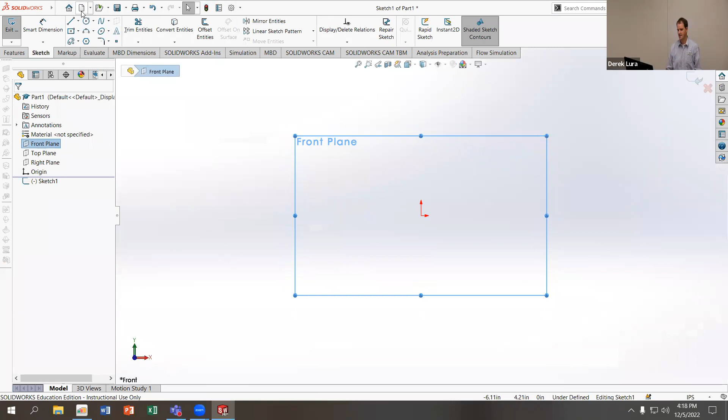I'm going to go to my front plane, it's my favorite plane to sketch on. I'll give myself a fairly generic spline pattern of basically a little head, and then a slightly larger body. Then I'm going to close that off with a vertical line going down the middle of the part. Just to give Solidworks a clear intention of what I want, I'm using a center line that's a little bit longer than that. I'm going to clean this up.

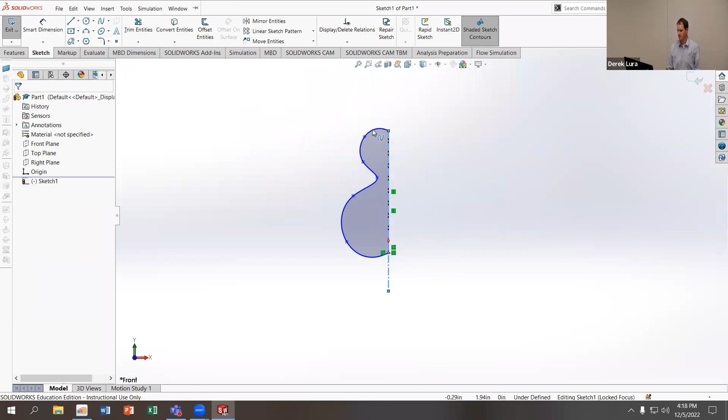I'm going to exit the line tool, click on my spline, and make sure these first two lines are horizontal. I'll click on this line here, make it horizontal, which makes the top line all flat. Then do the same thing on the bottom of the spline - click on the horizontal, that makes the bottom of the doll flat.

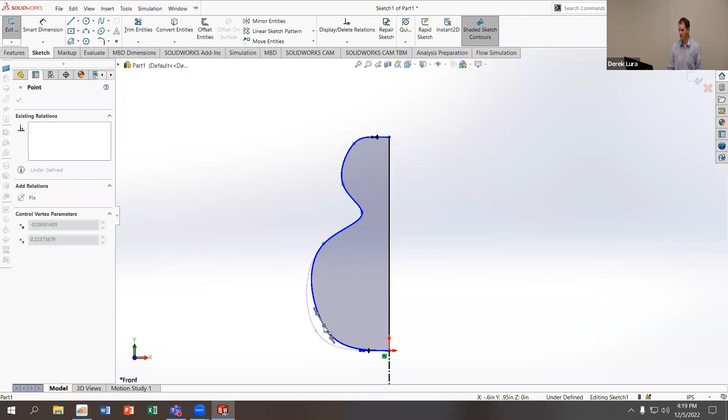Then I'm just going to balance the kind of curvature of the head and the neck. That's a little bit more what I want. I don't want this neck to come in too far, just because that'll make it harder for me to manage the balance of where it nests together. So that looks okay, I'm going to keep that.

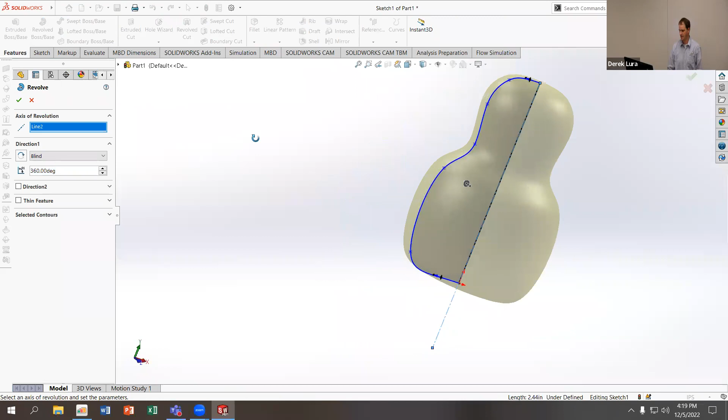I'm going to revolve it. Select my axis, which I was hoping not to have to do. Hopefully it works, but I'll open it up. And so that'll be the core of my doll.

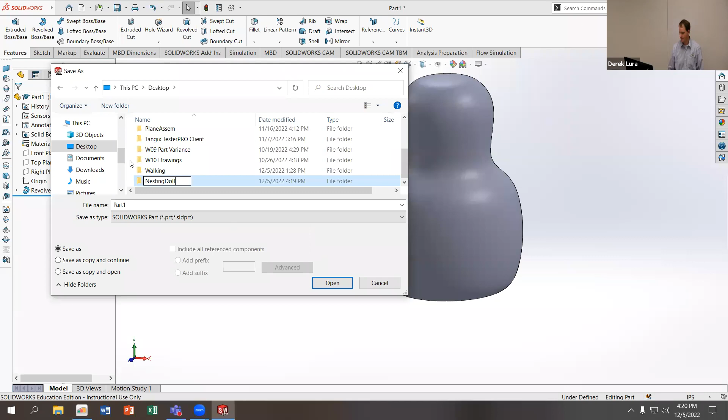So I'm going to save this - to the desktop, and make a new folder called NestingDoll. I'm going to save this as core.

Now what I want to do - the core of the nesting doll doesn't come apart, but all the subsequent layers are larger, empty versions of the core that have a split around the middle. So I'm going to make a derived part from this core, scale that up, cut it out, and then also go through and add those pieces to it.

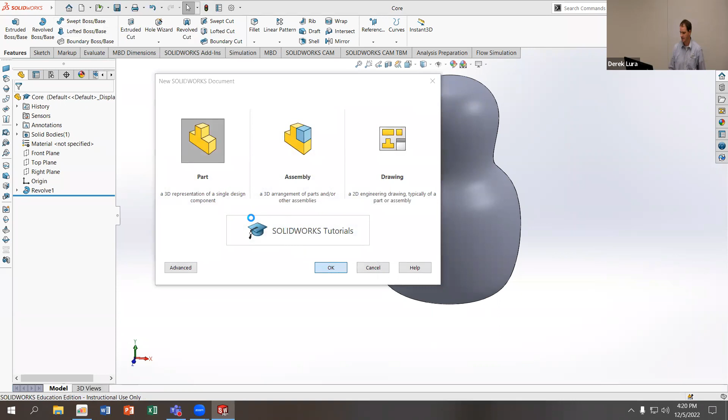So I'm going to do a new part, also in inch pound second. I'm going to go find my core file - to my desktop, my nesting doll folder, my core. I'm just going to drag that into this window.

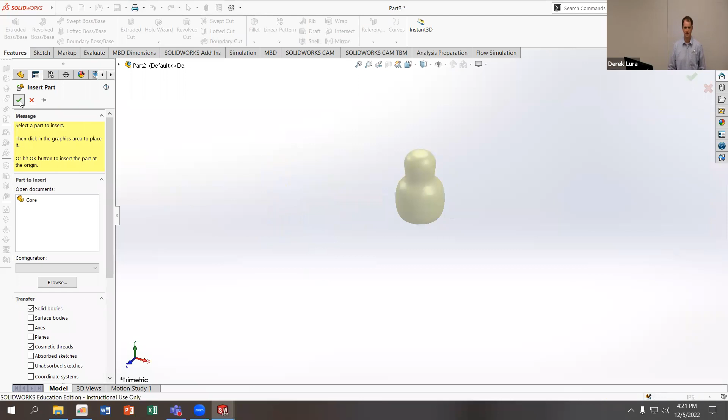It's asking, do you want to make a derived part? I'm going to say yes. I'll click on the green check mark because I want the origin of this derived part to be the same as the original part. I'm saying yes to make the units the same - I thought I'd already done that, but I want to make sure it's consistent.

To make this a bigger, hollow version of the doll, I want to scale this up, then shell it out so it has a certain thickness. In the assembly, we'll verify that thickness is appropriate. I also want to make sure I have clearance so these things will fit together in my assembly, and then I can cut them apart and have that work.

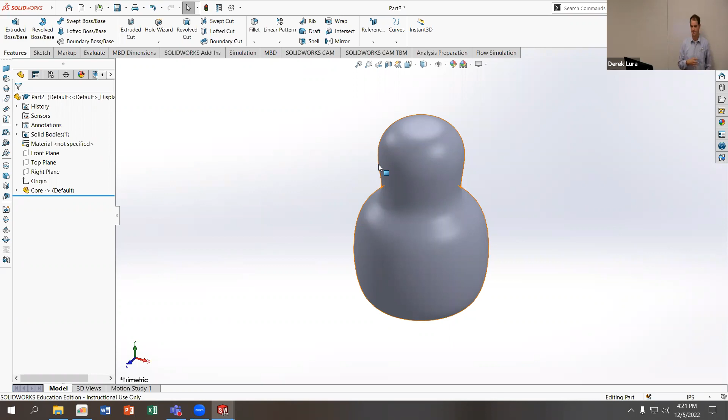So to make them work as two separate cut pieces, I really need a top and a bottom configuration for each of these. And then I can also make my scale a configuration. So let's walk through that process fairly quickly.

First, let's scale the part. I'm going to use the scale tool to make this bigger relative to the origin. I'll use a uniform scaling about the centroid of the part, and make it 1.5 times as big. Again, I don't know off the bat that that's an appropriate scaling, but I'm going to use my assembly to check and see whether this nesting doll actually fits together, by looking for collisions and moving it around based off those positions. So that's my new doll.

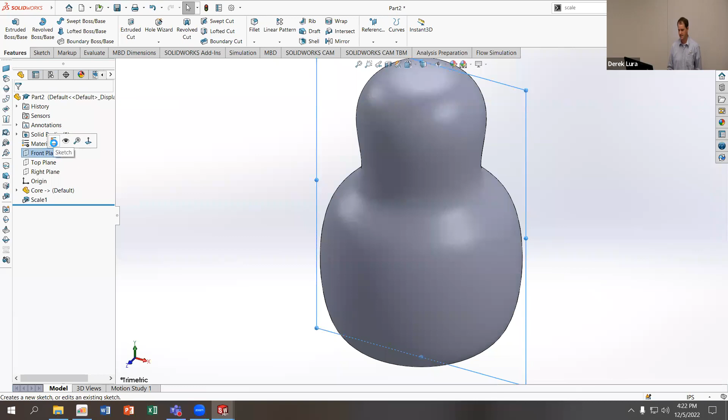I need to cut it into two pieces. So I'm going to go back to the front plane and sketch. I'm going to draw the line I want to cut this around, starting on the outside of the doll, going through it a little bit, making a little bit of a shelf, and then coming all the rest of the way in towards the middle.

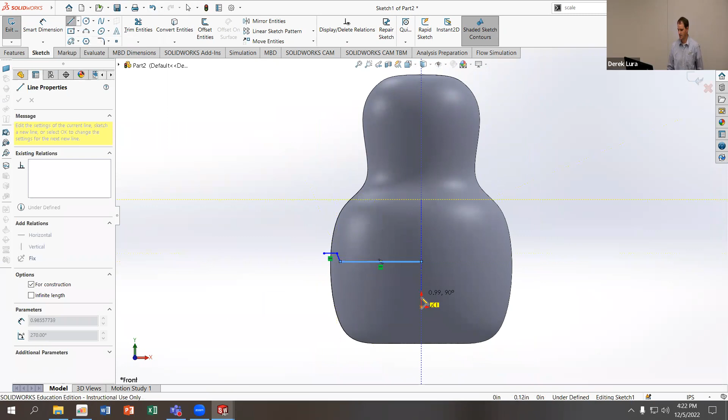And then I'm going to give myself a center line that goes vertically through the origin. What I'm going to do is thin revolve this, and then I'll shell this last inner portion after that. I might want to add some dimensions to this so I know exactly how big it is, so we'll give that some dimensions.

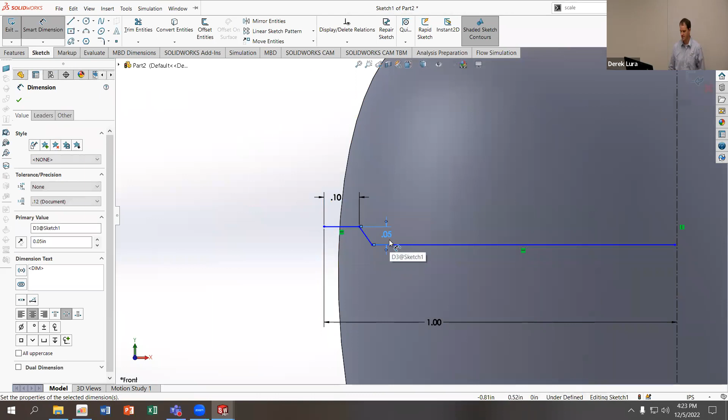I'll make that 1 inch. I'll make this little end section 1/10 of an inch. I'll make this section here—I don't really want to go down that far, just enough of a shelf that I have capacity there. Something convenient for this angle, 45 degrees, that's going to help us locate the 2 levels of the doll.

And then you just figure out how far up it needs to be from the origin. So just going to get that point. That looks good. And now I'm going to use my features tool.

I'm going to use a revolve cut. Actually, I do want to make sure that this point here lies on my center line. So I'm going to make sure that lies on my center line as well, because I do want to totally cut this doll into 2 complete pieces.

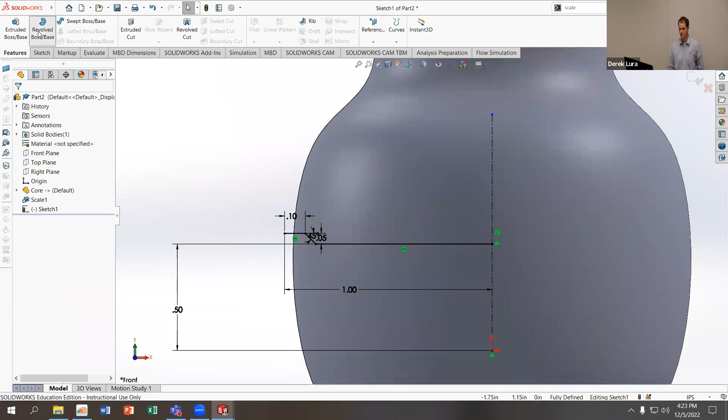So I'm going to do revolve boss base. I want to say no, so I don't want to automatically close this. I do want to use a thin feature, using mid plane, and I want this to be really thin. This is really just the clearance between the 2 halves of the doll.

So I'm going to make this 0.01, so 1/100 of an inch. I'll accept that, that's right. I also want to make sure that I'm not merging these 2 together, so I'm going to unclick the merge result function.

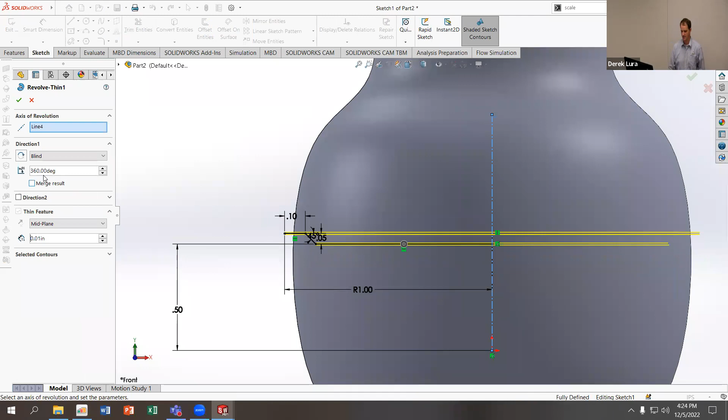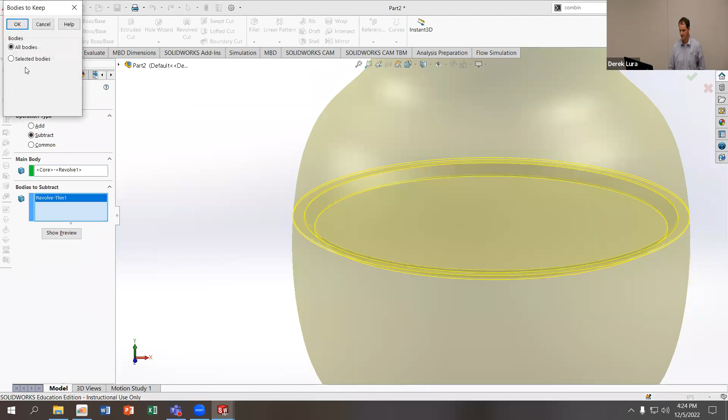Now I've got these 2 portions. I'm going to subtract the disk that I just revolved from my original body. So I'm going to use the combine feature, and subtract from this core body my revolve. And then I'll keep the remaining bodies.

Now I've got my piece. Now I'm going to make 2 configurations, 1 for the top and 1 for the bottom. So I'm going to do a new configuration, call this bottom, and then I can rename my default configuration.

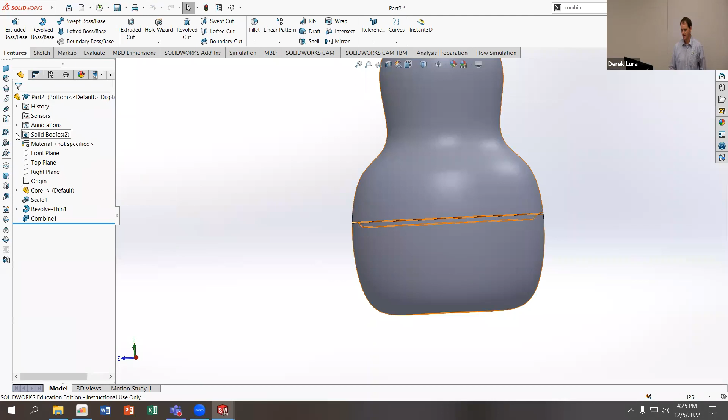So if I start with my bottom, because that's the current configuration that's active, I'm going to delete the top. Again, this is not the same as actually deleting the body—it creates a feature that deletes the body that we can roll back and suppress and treat like any other feature in SolidWorks. And then I'm going to shell out this bottom portion.

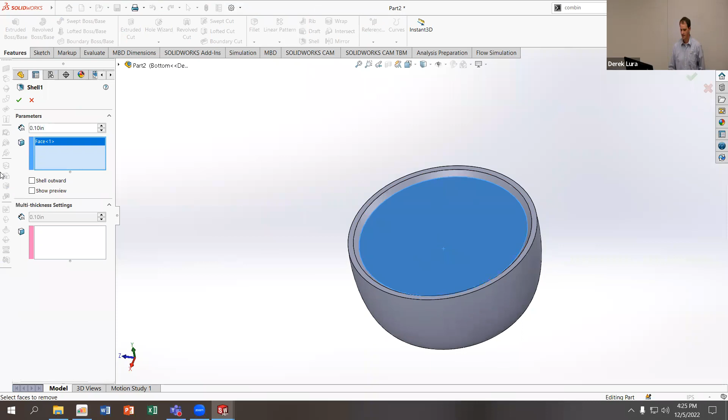So I'm going to use the shell tool, and preview here. A thickness of 0.1 inch, that's probably appropriate. Let's just see what it looks like. Okay, we've got a little rounded edge there. That looks okay. I'm going to save this. We'll call it outer one.

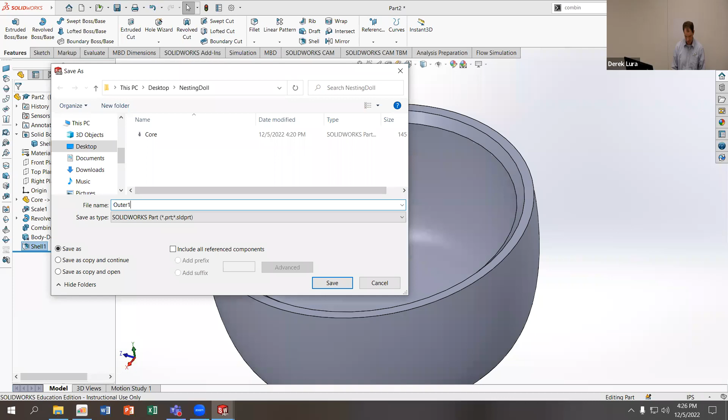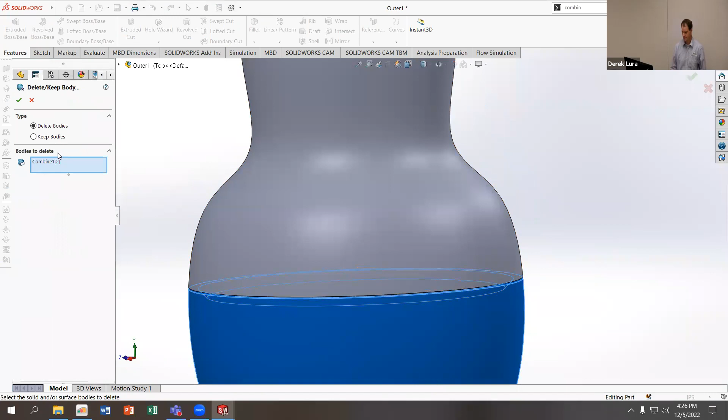And then I'll switch to the other configuration. In this configuration, my delete of the top is suppressed, and so is the shell. So on this new configuration, I can delete the bottom and then shell the top.

That one didn't quite work as well because I have this large overhang from this inner edge here. But what I can do here is go into our shell options and use a multi-thickness shell. I'm going to set the thickness relative to this guy here—oh sorry, wrong one—bottom here, and I'll make this thickness very small.

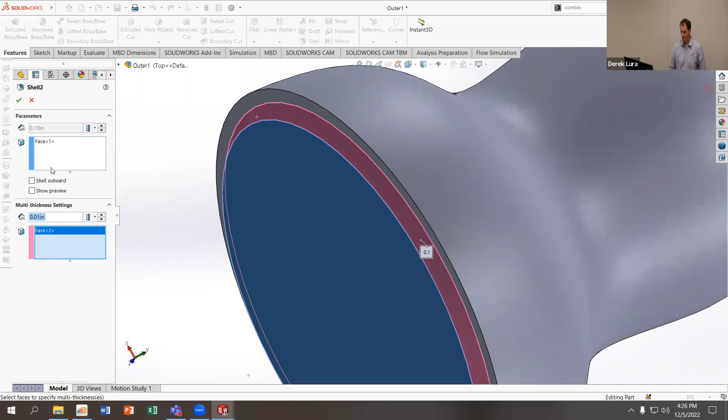So let's say this is 0.01, not 0.1. And so that makes this overhang on this portion quite small. Another thing I can do here is if I want to get rid of that edge, I can add a round to that. It's going to really kind of cut away that edge even with a fairly small radius round.

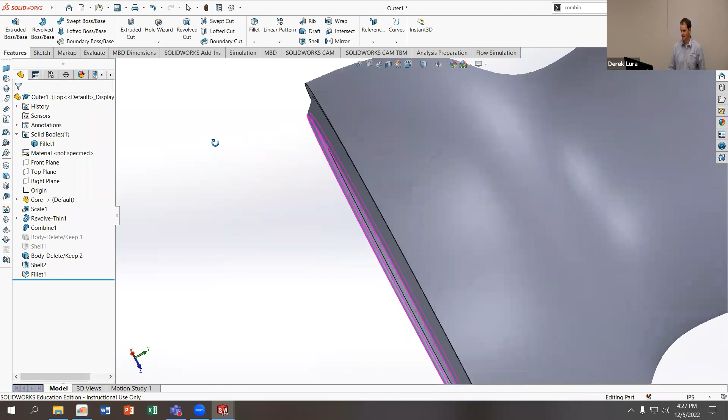So that helps smooth that out. Just a couple of tricks you can do to get that to work out a little better. If I wanted to totally cut out that top edge, I could, but I do want it there to help me locate the doll relative to the bottom portion.

We're going to save that. Now I've got these two configurations. I can put them together to make my next step, so I'm going to go into an assembly, make assembly from part. Let it load. In my assembly, I'm going to start with the core.

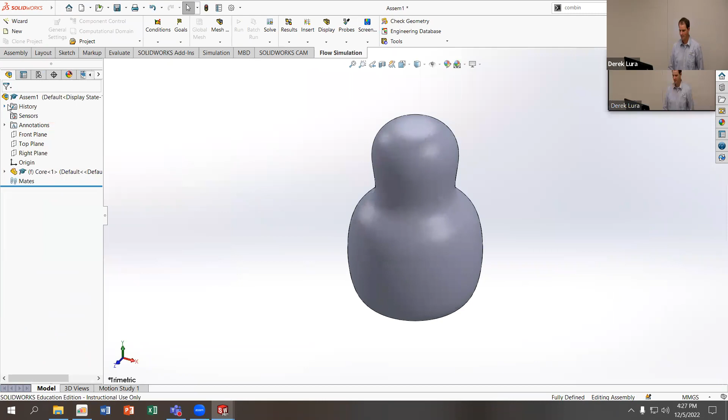Add my outer layers. So getting back to assembly, insert components, do outer one, accept. Then I can change the configuration of this to top and bottom, and also insert another component. Because I'm using that check mark, all these are fixed to start off with, so this is the first original configuration.

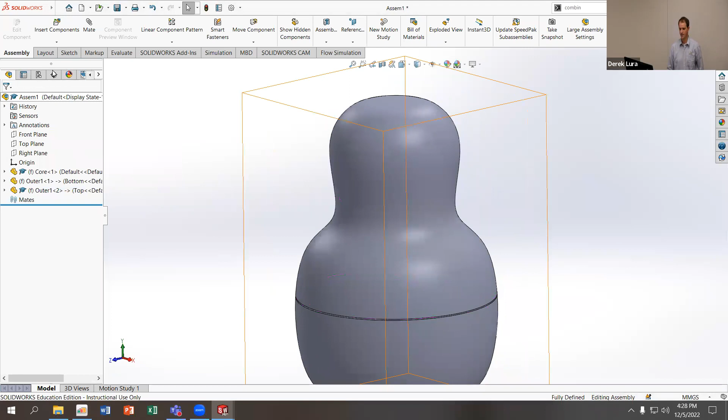I can look at my section view. I can see that nothing is hitting each other at the start. I can also evaluate, look at interference detection, calculate that I don't have any interferences, so those fit together just fine. And I can float my top, and then I can move it.

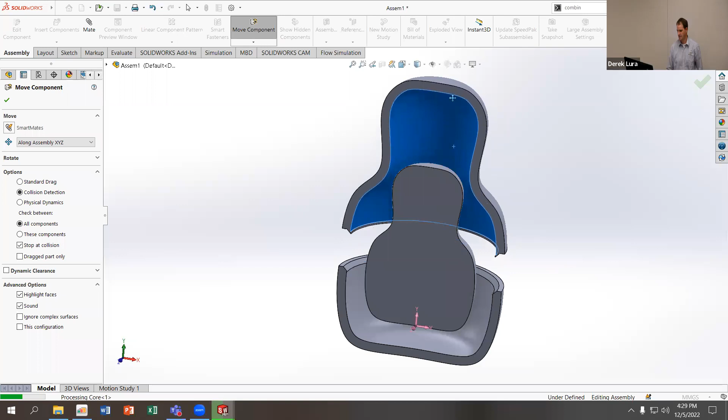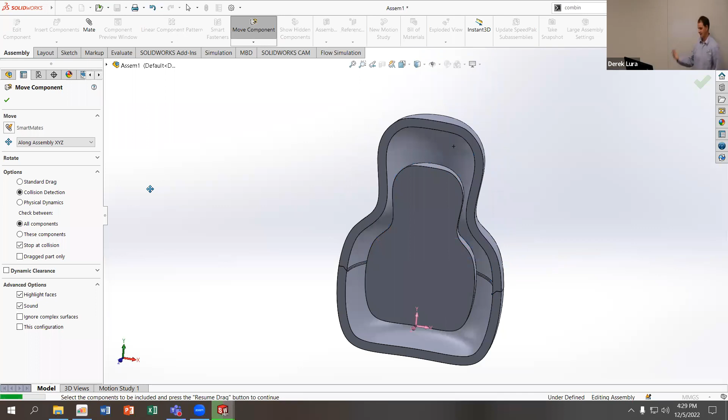So I can confirm these components will nest together without hitting each other. And I can go back and change the profile of this to do that again, and repeat as many times as I want.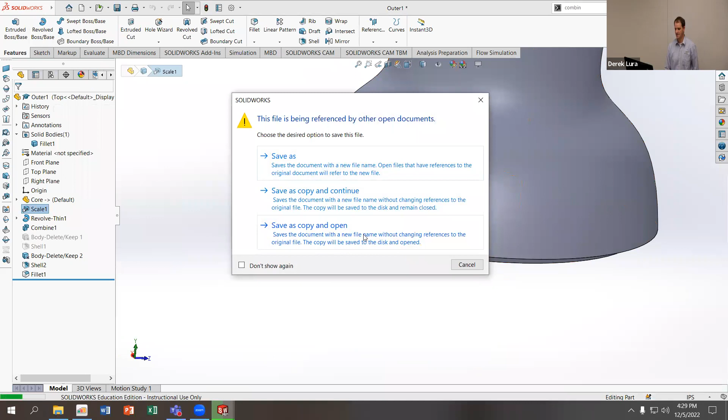If I want to get extra cores of this to get more layers of the doll, it's pretty simple for me to come into my outer component. I can either modify this scale or scale again. If I want to scale again, all I have to do is save this as a new part. I'm going to save it as a copy and open - this is saving as a new name without changing references to the original file.

So I should leave the original file where it is. Change this to outer 2. I can keep the original document open, that's fine. And I can edit this scale, and I can make it say 2. And that broke my part.

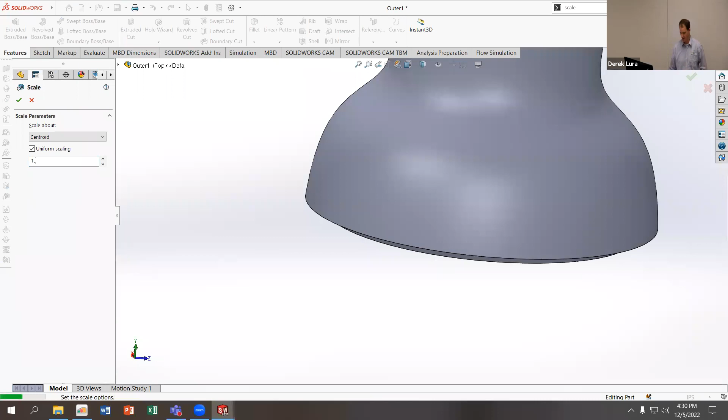If you have that issue, well, maybe we just scale it after that - use the scale feature again. The breaking is most likely because the thicknesses of the cut that I did on the original didn't all intersect the model the way they're supposed to after that. So I can save this.

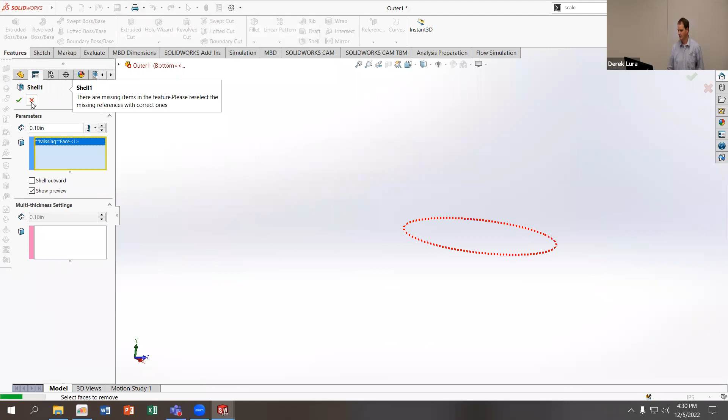I want to make sure that scale exists in both configurations. So I'm doing my bottom. Not sure why that one... Oh, because it has this new scale still.

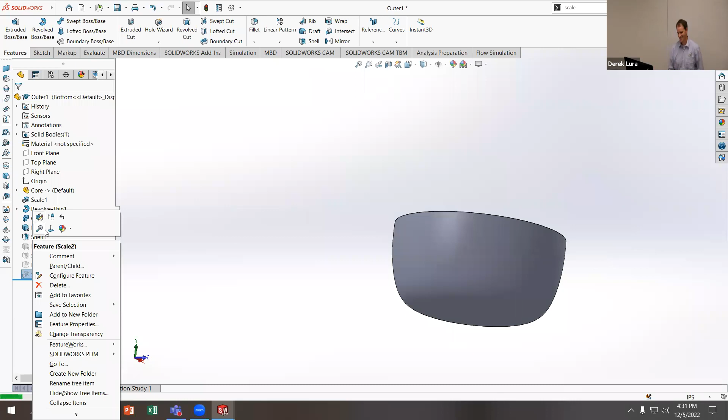So I changed the scale for all the configurations, and then change it back for one of the configurations. So I'm going to unsuppress the scale in the bottom. Now I can check and make sure that my top and my bottom will work fine. And we're good - this is outer 1.

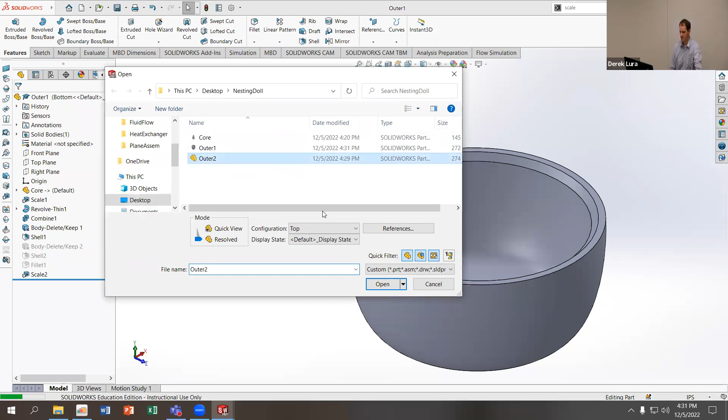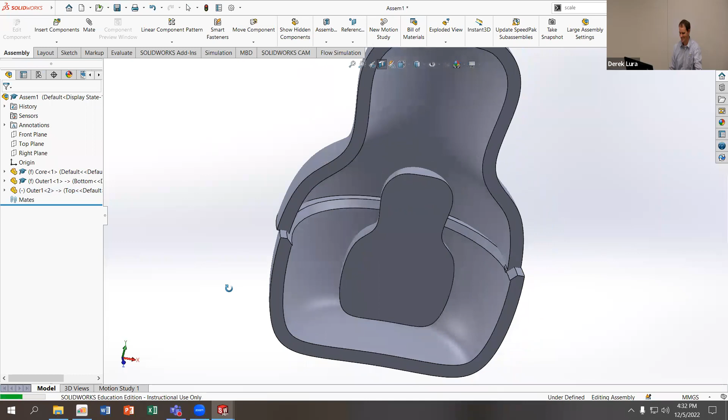It opens, give it a second. Very good. I'm gonna open that part now, then outer 2. Not sure why it doesn't want to open that part.

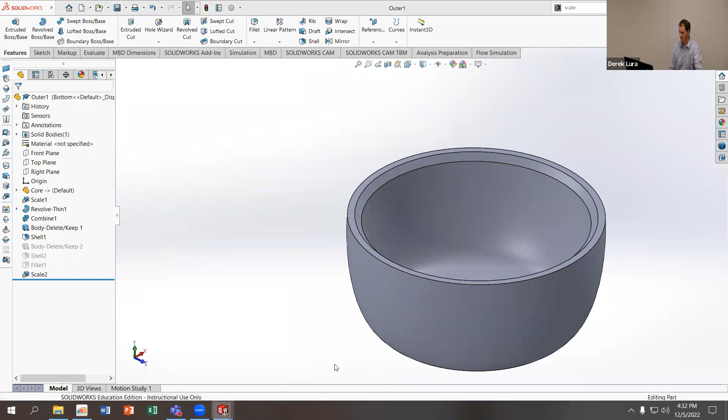I'm gonna try putting it in the assembly, see what happens. Yeah, it's the same size as the outer 1. I can change the bottom configuration as well. The bottom configuration on outer 2 is the right side, the top configuration is not. I don't know why it's not letting me open this part though.

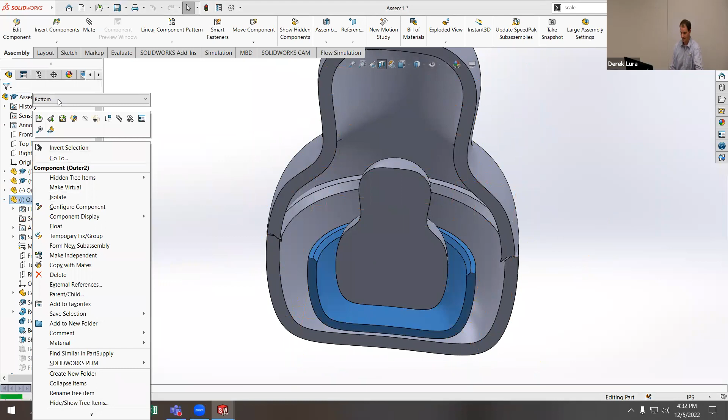There, that's fine, we just need to rebuild. All right, let's do this. I'm going to copy this one and paste it in again. Now I've got my two configurations for the top and bottom with another layer, which is what we wanted.

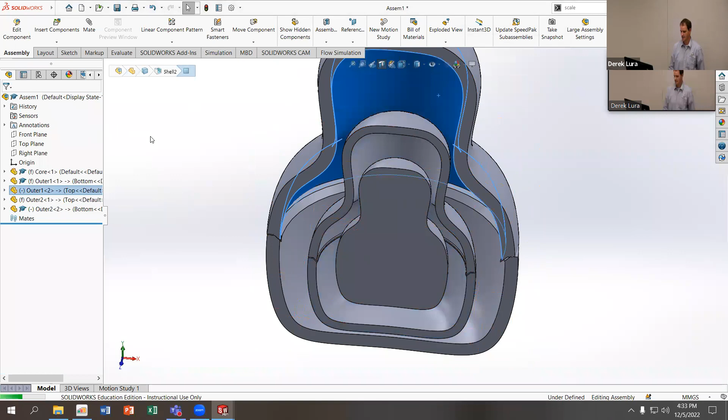This one here is getting a little bit offset. What I'm going to do is make the right planes together so I can only move it vertically. And I'll also make the front planes together. That's just going to constrain my part a little bit more.

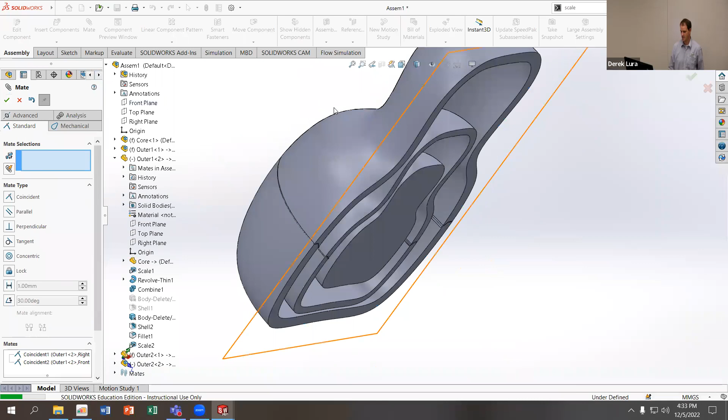And I can do the same thing for this bottom one as well. Again, go to my move. I can check and make sure that my new layer also doesn't collide. I've got that handle set up. I'm going to move it just to the point where it has collision again, so collision on, right down.

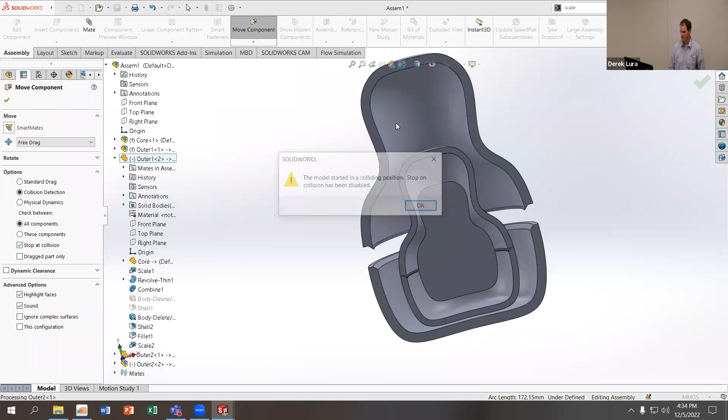I want it to stop at the collision. Why isn't it stopping at the collision? Stop at the collision. The model is starting to look like it's colliding already. Oh, probably these ones are colliding, the top and the bottom portion.

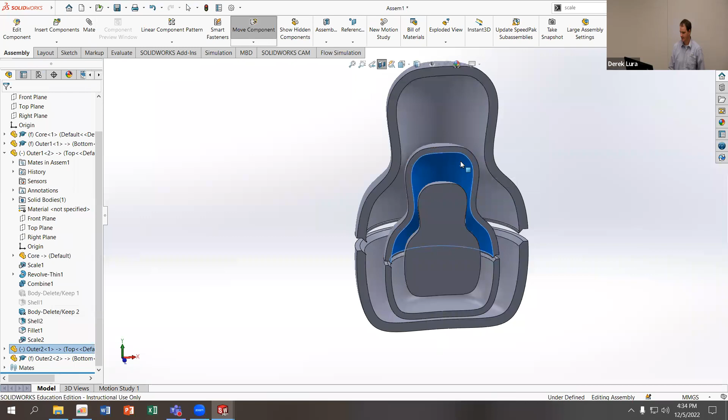Let's go to my outer two top. Let's move that component, I've got to float it first. Let's float that. Well, the bottom is not floated. Let's fix the bottom, we don't want the bottom to be free. Float the top. And now they're not colliding.

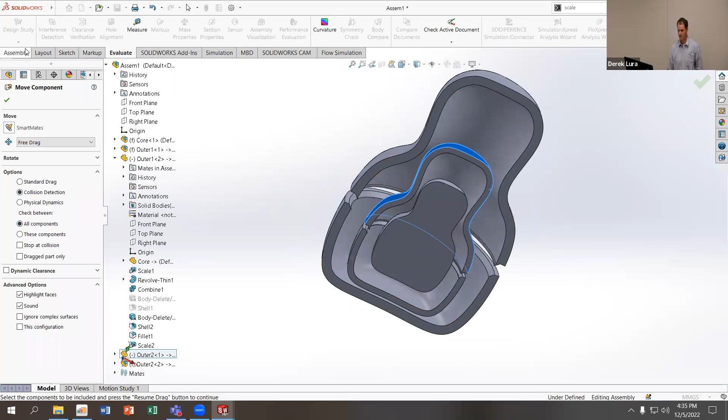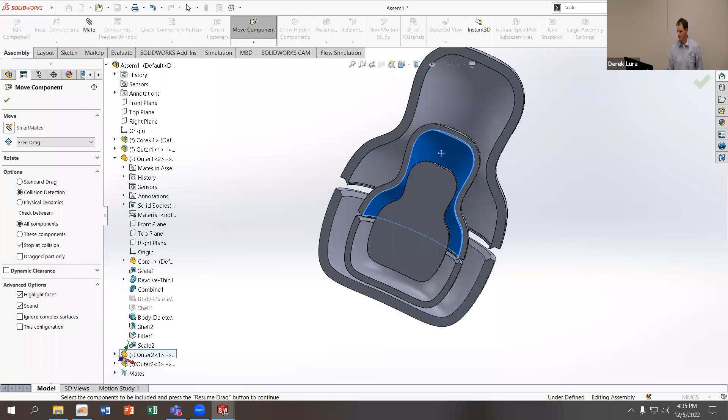And we can move them down into a collision position. Evaluate. This shouldn't be colliding with anything. Do I have an extra layer maybe? No, it looks okay. I'm not sure what it thinks I'm colliding with, but I don't think I'm actually colliding with anything. I'm just going to get this close so we can see what the exploded view looks like. Probably just need to save and close this.

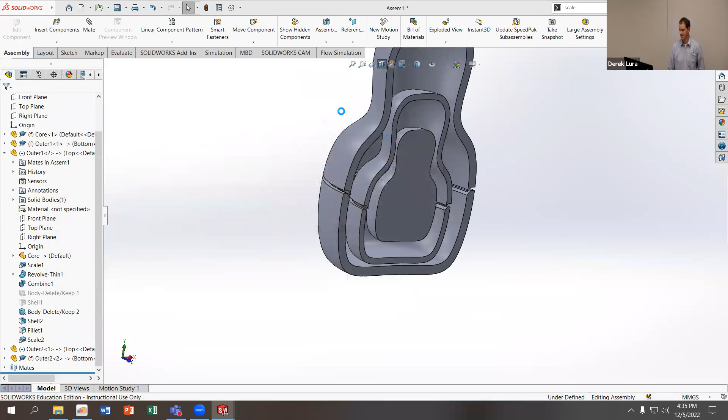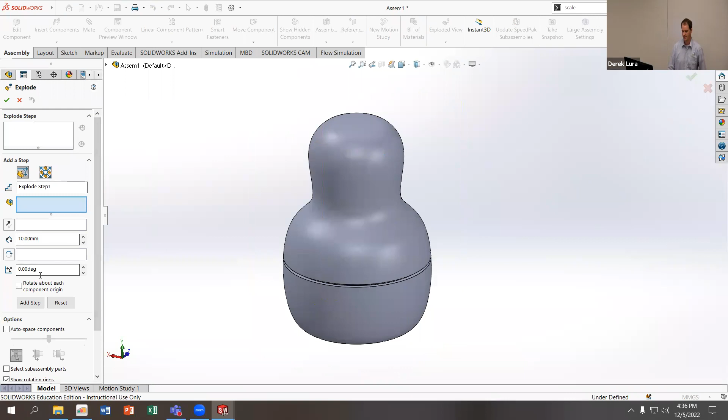Last thing I wanted to talk about briefly here was how to do the exploded views. So on here in the assembly configuration, we have the option to add an exploded view. So we do a new exploded view. And then all we need to do is go through the steps of moving the components. The hard thing that can be omitted here is we want to add a step after each time we move.

So I'm going to move up, then I'm going to hit done. Then I'm going to move it to the right, hit done. Then I'm going to move it down, hit done. And I'm going to move the middle doll out.

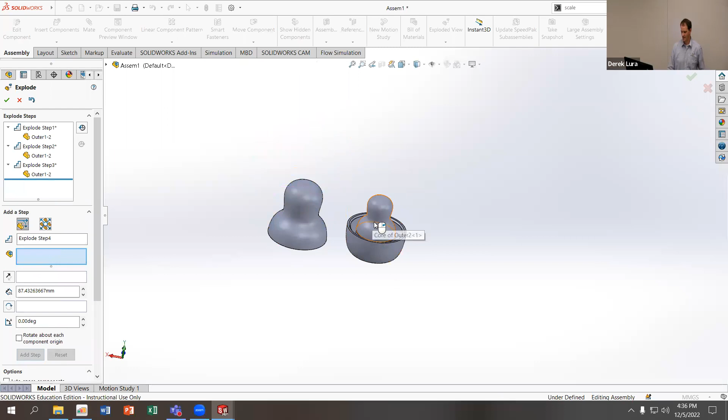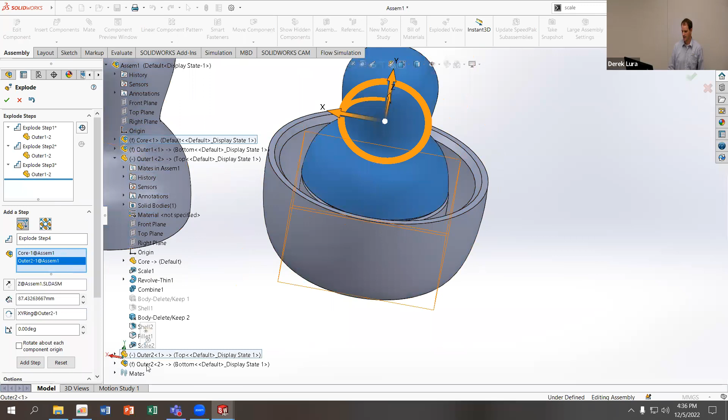So I'm going to click on both of these parts. Let's do it from the model tree here. We do the core and the outer two components. Got the wrong selections, core and outer two. Move those three up.

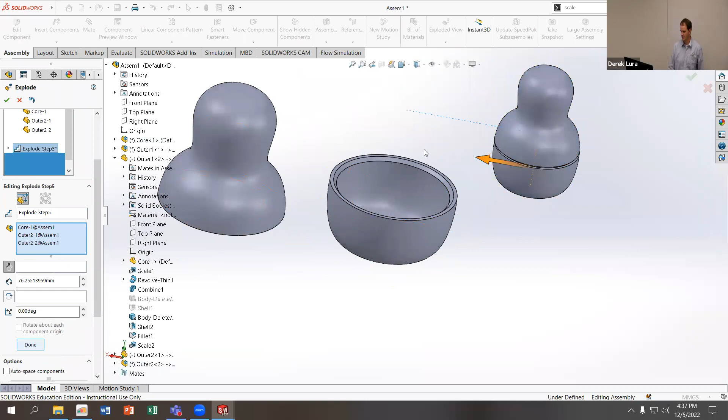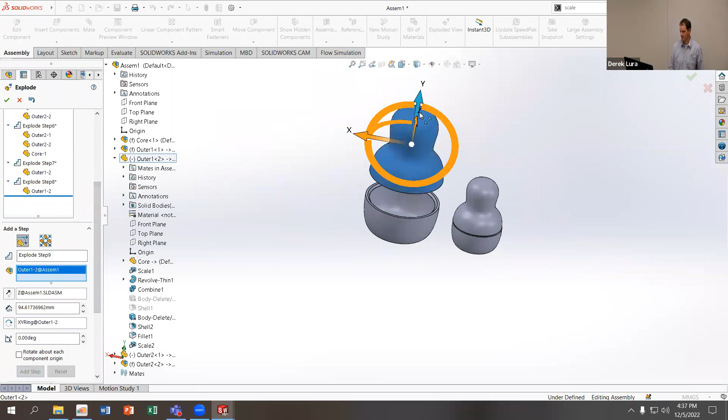Sorry, I didn't hit done. Up, done. And then over, done. And then we can move them down. Then we put the lid back on the first one. You can be much more specific about these if you want to use the exact distance move. Maybe a little bit too complicated with this process, but you get the idea.

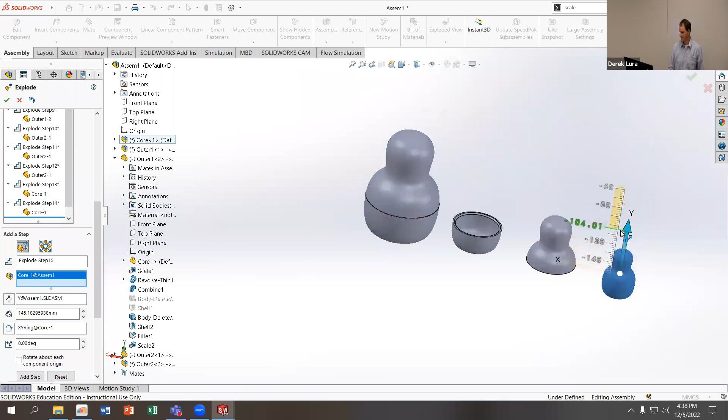I get impatient with this sometimes because I want it to move faster than I can. I probably should look into whether there's an auto-done step speed movement option after I do it, that would be easier for me. Or you can move more than one direction at a time.

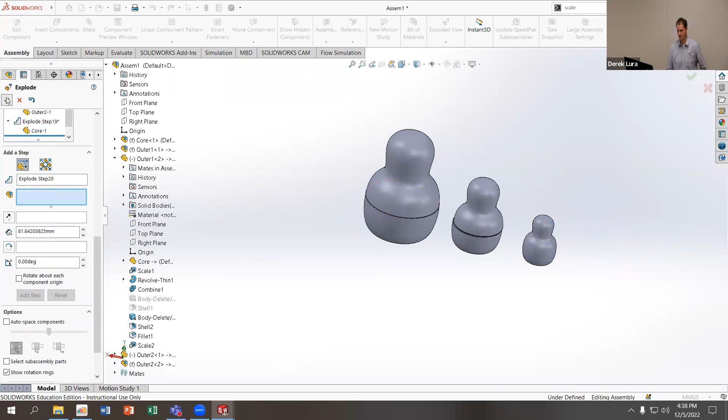All right, so I put a bunch of movements in here. And what I can do in this exploded view is animate the explosion. And I can also animate the collapse. Kind of fun, right?

There is a lot of utility in this in terms of communication of assembly processes to anyone. So if you want to show someone how a thing is supposed to be assembled together, this is a great way to do it. Also, if you just want to communicate the number or complexity of components in an assembly, you can explode these things out just to show where all the parts are and what they're for.

You can record these to AVI, you can stack this on top of photo rendering, so you can make really high quality animations, although it's a lot of work to do it the way they have it set up. So hopefully that makes sense and you enjoy watching this.

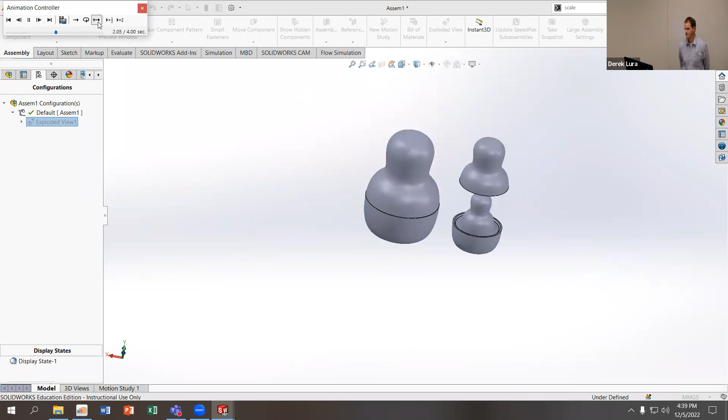You can put it on a loop, you can just constantly assemble and disassemble the dolls. I want it to go back and forth - assemble the doll, disassemble the doll, assemble the doll, disassemble the doll. And it will play like that. We can make it go faster, or slower. You see, there's a lot of options. All right, that's it for today.